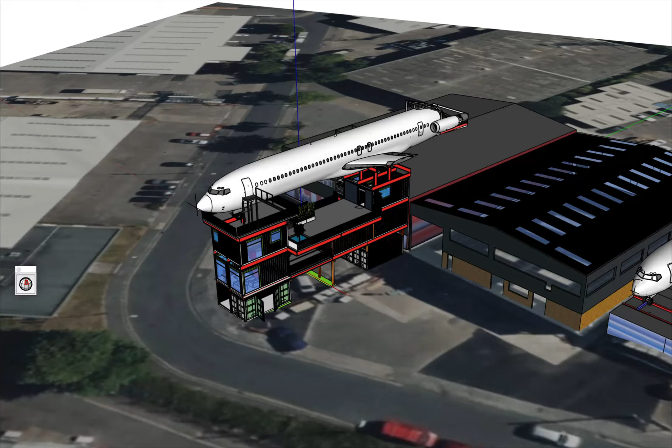Okay, in this video I'm going to talk through the latest ground force construction design. There's been previous videos you might have seen. This one's up to date and it's based on the exact containers and the steel work that we've procured. So let's start with the overview. Actually looking at this one.

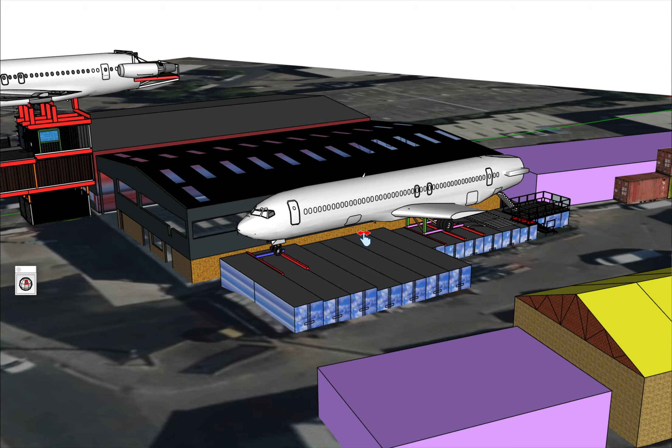Here's the first one I've already done, which is containers in an aircraft. So this has been done before with great success. This is a new one. It's very much the same thing, but with 2 containers higher, which has a bit more complexity to it. So let's start with the ground floor.

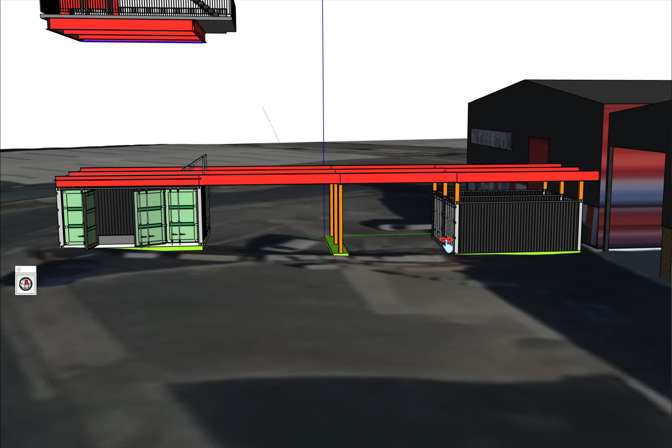So down here, what we'll be doing, firstly the site, we're on a slight slope. It's about a 500mm offset. We've used a theodolite to establish that. What we need is a foundation here for the north tower, a foundation here for the 3 columns, and a foundation here for the south tower.

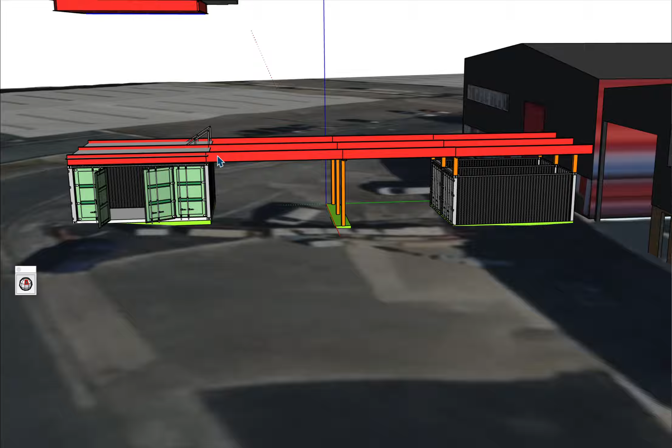Now the north tower and the south tower are all 20-foot ISO containers, and to deal with the offset of the height, we're going to put some vertical columns in above the 20-foot containers at the rear, thereby creating a bed of these RSJs. All the RSJs I'm using are 150 wide by 450mm high by 6mm thickness. That's wildly over-engineered for what we're doing, but I like having a big factor of safety, and throwing more metal at it gives us a belt and braces approach, which I like.

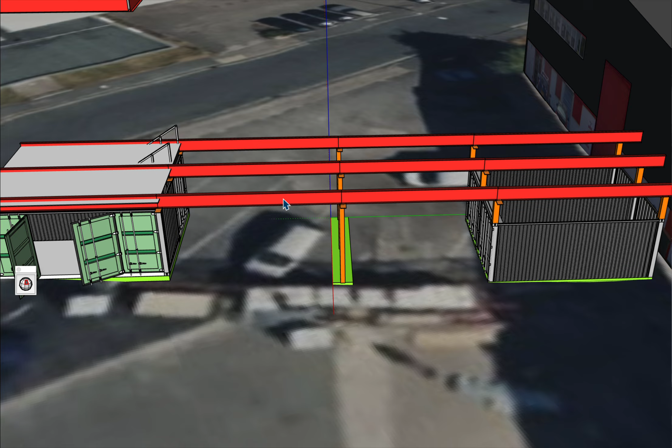Now, it's not shown here, but between these RSJs we'll have some purlins, mezzanine style ones. They'll be on 500mm centers, and that will hold the decking. So we have our bed here, nice and flat. And then on top of that, we then put the next line of containers, which are 20 foot in the north tower, 40 foot in the south tower, all high cube structures.

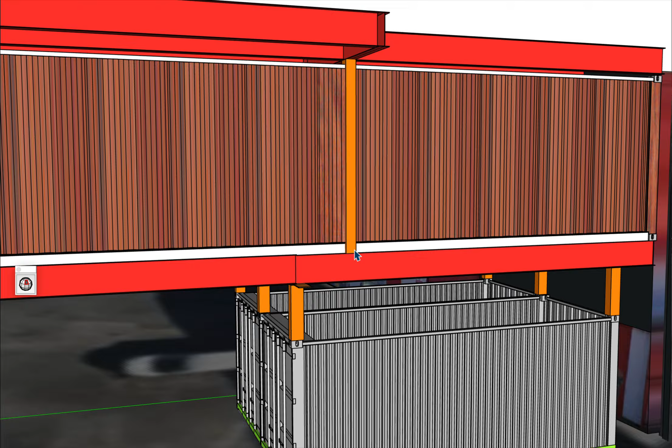Now, on this 40 footer here, we need to add an additional vertical column, which will be a series of sections of metal that connect the RSJ to the underside of the floor beam, then with a box section welded inside the container up to the transom, with more steel that then connects it to the RSJ above. You'll see why in a minute.

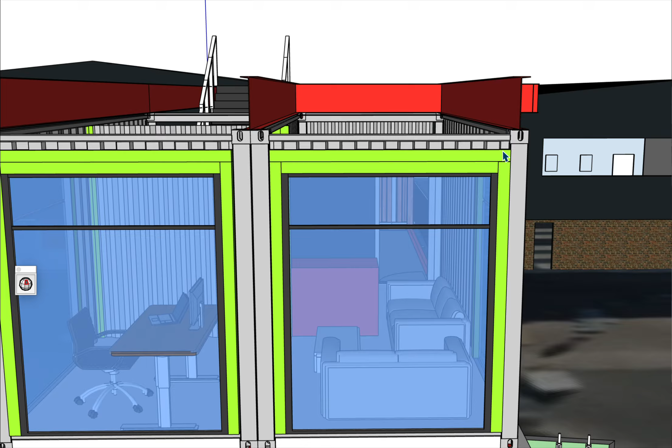Over here's the decking I talked about, and here's the containers. We will be reducing these window sizes, but there will be windows within them. Now, our methodology with these windows is to use a gusset steel plate in the corners, there and there, there and there. And also this green section will be a 60 by 60mm box section on a 4mm wall, thereby making the container stronger as a result of removing the corrugation than it was before, so we can therefore assume that they work to the standard ISO specifications.

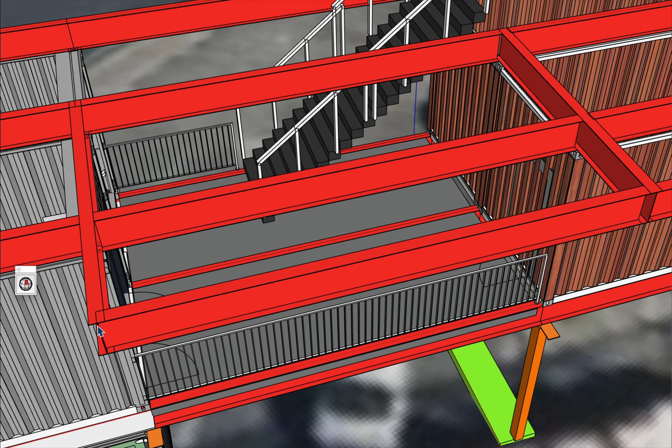Now, if we move up here, you can see the slightly more complex steelwork layout. What we've got here is this RSJ goes onto this corner casting and this corner casting, and there's a 2-meter cantilever sticking out. Same on this one here. And then we do an RSJ connecting across here, which will be done with bolted or welded cleats, and the rest of the containers can continue on from the corner posts.

Underneath each corner post, we will have a large plate, which will be a 400mm by 400mm, 10mm steel plate, thus allowing multiple RSJs to sit on it. All of these will be connected with a welded cleat. Again, belt and braces way over the top. So that's that. Next level up, second floor. Pretty much the same again. 20-foot containers at the front, 20-foot containers at the back.

And now you'll see why we need this column here, because that column is both taking the load of this RSJ coming out for the cantilever balcony, but also taking the compressive load of the corner post of the 20-footer above. I didn't want to omit that, because then we would be putting a point load on the center of what would have been a 12-meter span. So that column's very, very important.

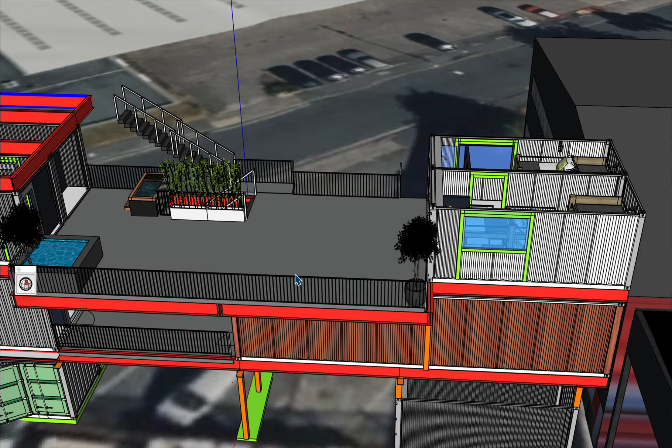Okay, yep, more steel work up here. Similar idea, RSJ cantilevers out, with more spans going between the corner posts. And this bit here being where the nose landing gear of the aircraft sits. Crucially, this RSJ is spread across both corner posts. So we're just always spreading the load out across the entire structure. Let's go up to the top floor now.

You'll see now that we have a decking that needs to be redrawn, but the decking would come back to here, and the RSJs for the nose landing gear stick out through the decking, and the aircraft sits on top. The aircraft's actually very light. It's about 32 ton with everything inside it. So for its area, very light.

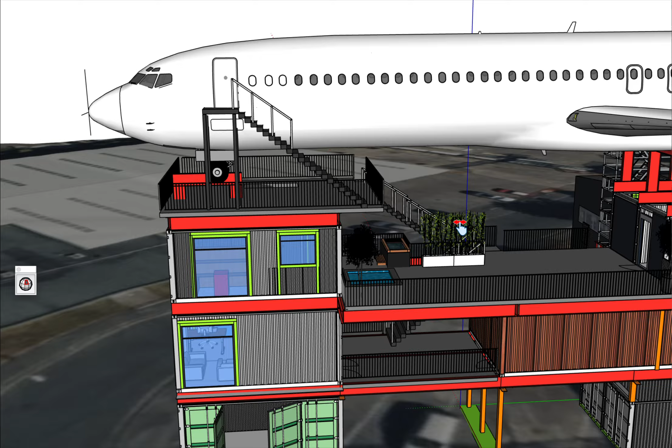And strapping these down is important. So the way we've done it with the last one is we've used 4, I think it was 3-ton straps, and the nose landing gear strapped down onto welded pad eyes here. And at the back, similar things go up to the landing gear attachment points, which can obviously take the full load of the aircraft with impact. So there's ample strength of those attachment points.

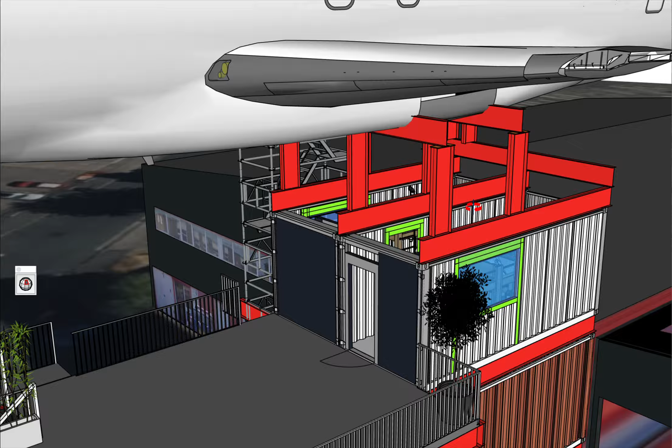In this area here, you'll note again, we're spreading out the load across as many corner posts as possible and then creating a dolly arrangement for the aircraft to sit on here. Additionally, which might be outside the scope of this, is we've cantilevered out the RSJs here so that we can then extend a balcony up to here. I'm still working the design of that, so disregard that for now. It's the containers and the RSJs which I want to draw attention to. That should give you a good overview.

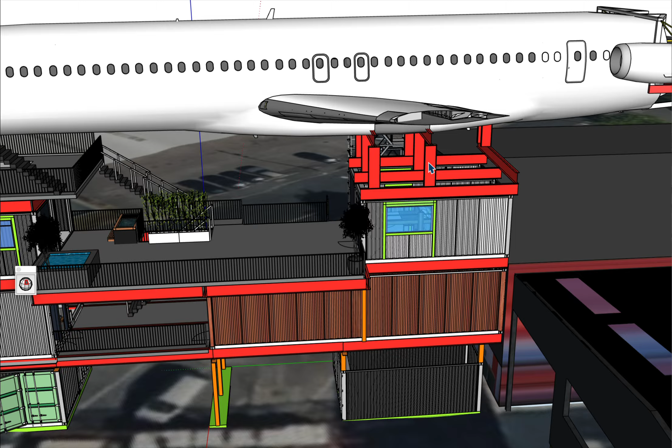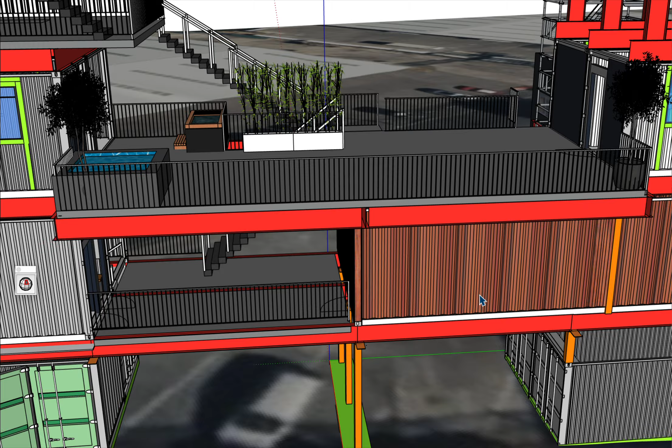Now, in terms of attachment, we're going to be chaining the aircraft to the steelwork and the containers. All steelwork connection will be flat plate steel, probably 60 mil wide by 8 mil flat plate, connecting the RSJs to the container, welded, same down here and so on. So everything's tied together, welded in situ. It's not demountable, so welding in situ is totally fine. We've got good access equipment as well. We could bolt, of course, but I think welding is much better for this application.

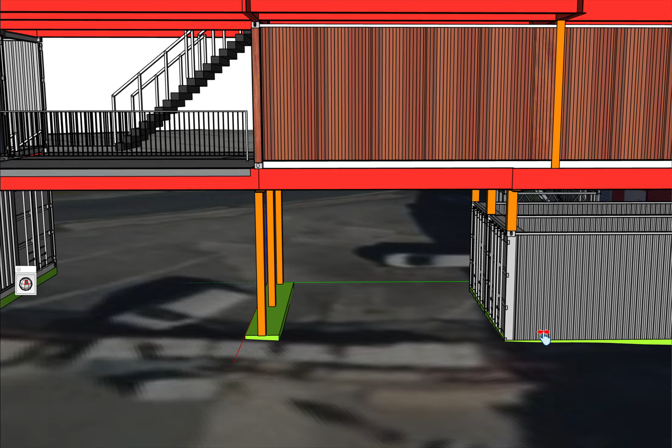And that's it. That's where I'm at. Obviously, a few more design details, but the overall container and RSJ structure is as I wish for it to be built. Keen to hear thoughts and feedback.